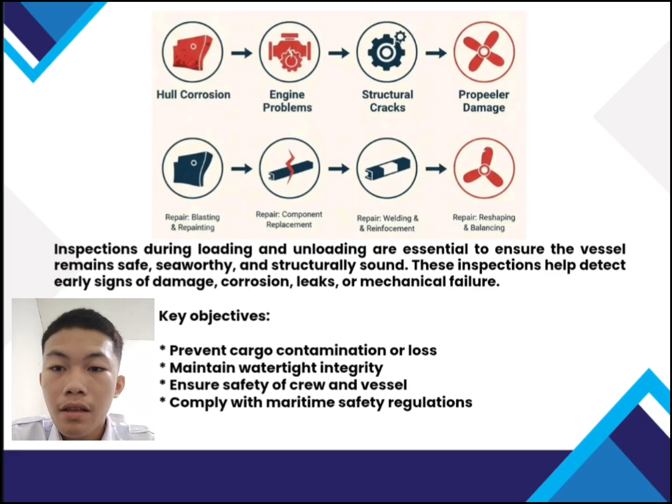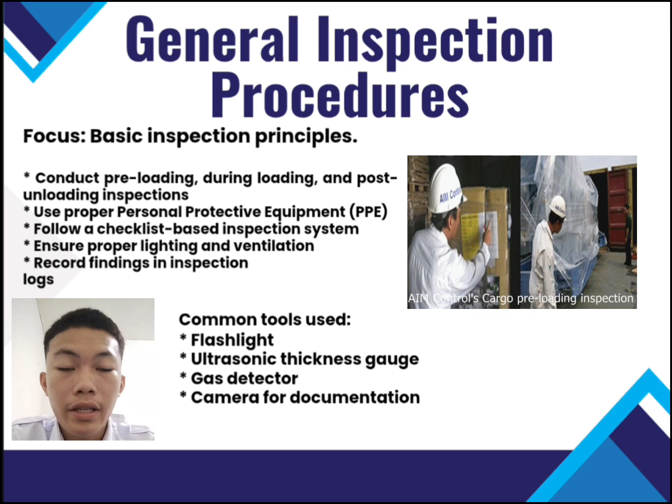General inspection procedures. We focus on the basic inspection principles. First, conduct preloading during loading and post-unloading inspections. Use proper personal protective equipment or PPE. Third, follow a checklist-based inspection system. Fourth, ensure proper lighting and ventilation. And last, record findings in an inspection log.

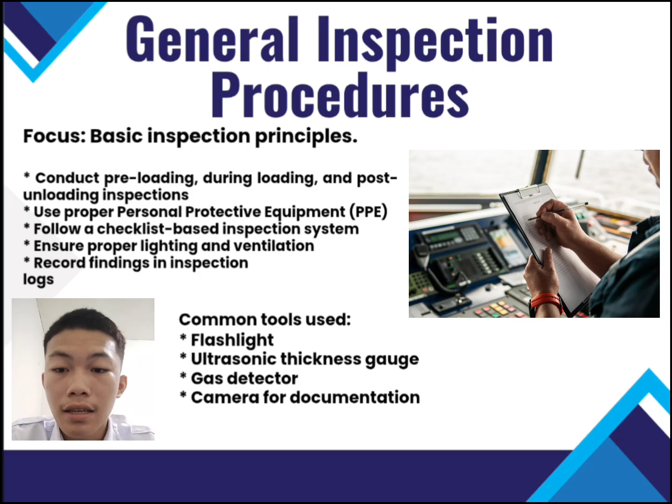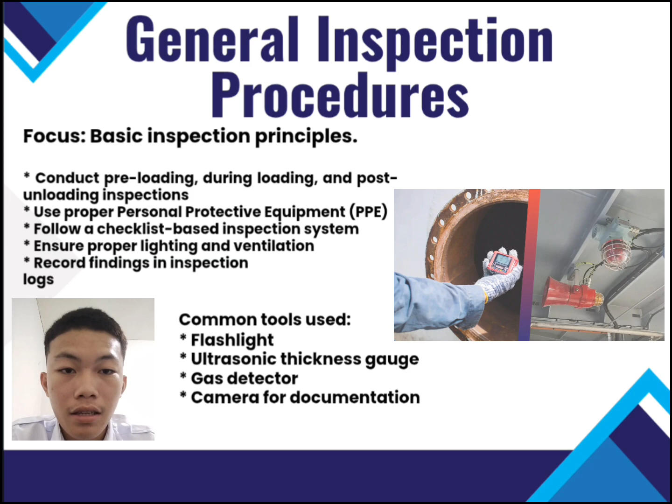And these are the common tools to be used. First, flashlight. Second, ultrasonic thickness gauge. Third, gas detector. And last, camera for documentation.

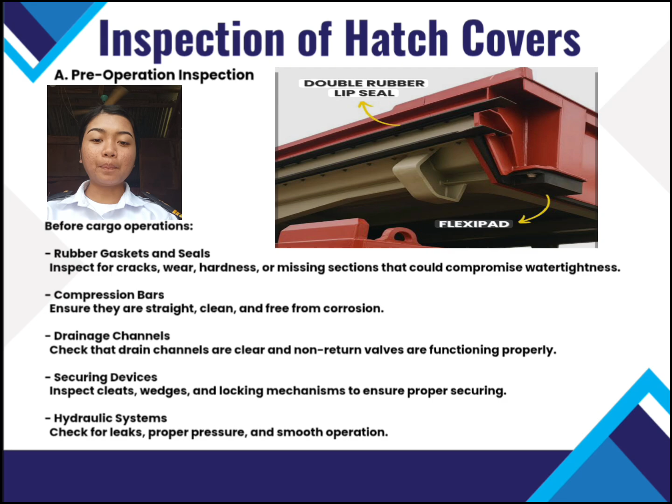Inspection of hatch covers. Hatch covers play a crucial role in protecting cargo from external elements such as seawater and rain. A. Pre-operation inspection. Before cargo operation, inspect rubber gaskets and seals for cracks, wear, hardness, or missing sections that could compromise watertightness.

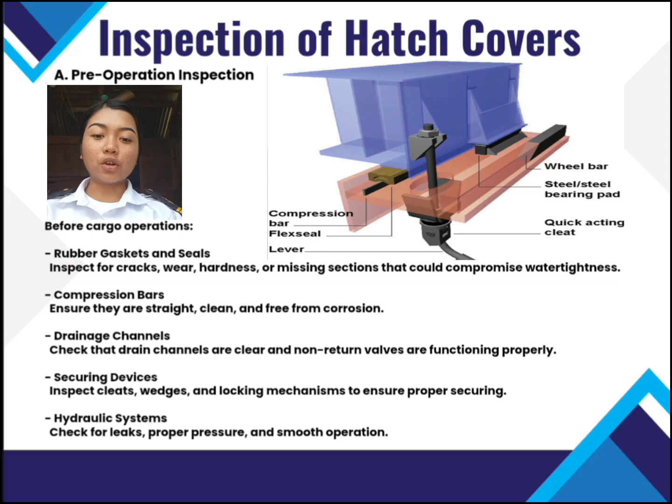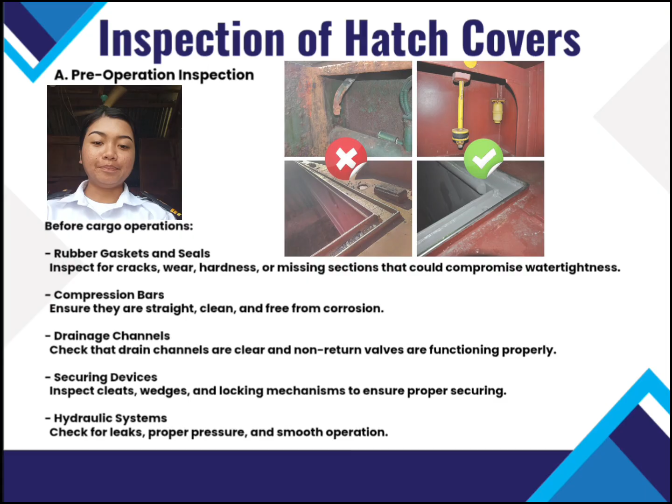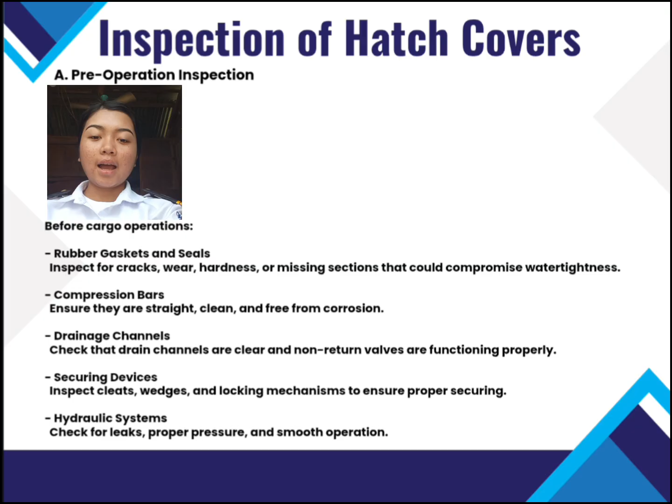Compression bars: ensure they are straight, clean, and free from corrosion. Drainage channels: check that drain channels are clear and non-return valves are functioning properly. Securing devices: inspect cleats, wedges, and locking mechanisms to ensure proper securing. Hydraulic systems: check for leaks, proper pressure, and smooth operation.

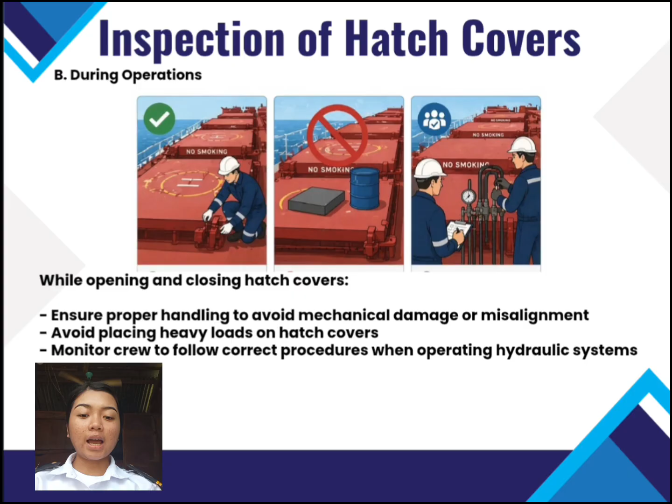B. During operation, while opening and closing hatch covers: ensure proper handling to avoid mechanical damage or misalignment. Avoid placing heavy loads on hatch covers. Monitor crew to follow correct procedures when operating the hydraulic system.

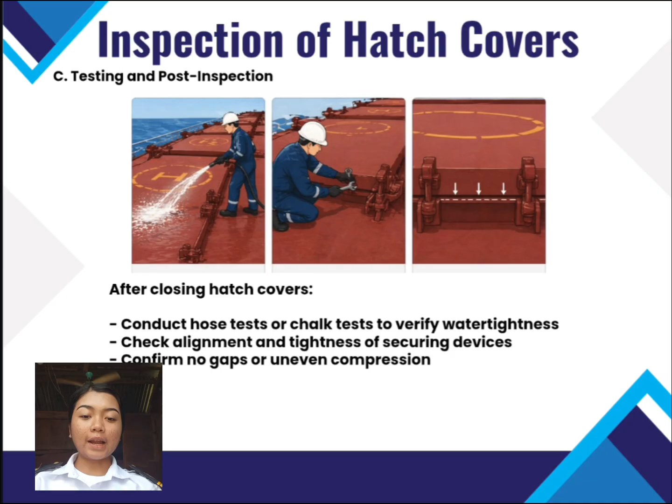C. Testing and post-inspection after closing hatch covers. Conduct hose test or chalk test to verify watertightness, check alignment and tightness of securing devices, and confirm no gaps or uneven compression.

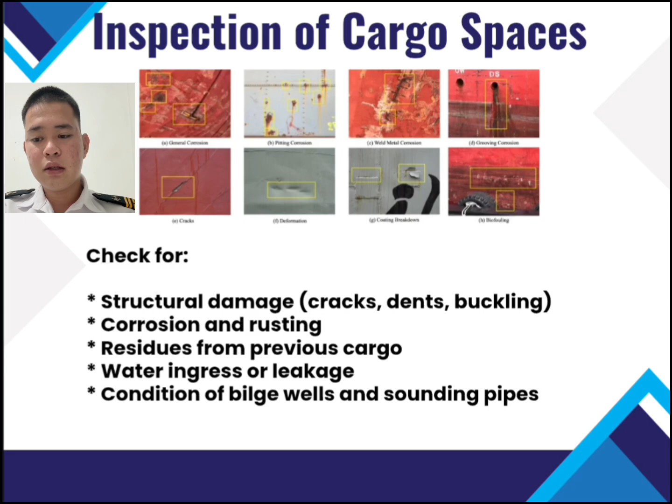Inspection of cargo spaces. Inside the cargo holds, check for structural damage, cracks, dents, buckling, corrosion, and rusting. Residue from previous cargo, water ingress or leakage, and condition of bilge wells and sounding pipes.

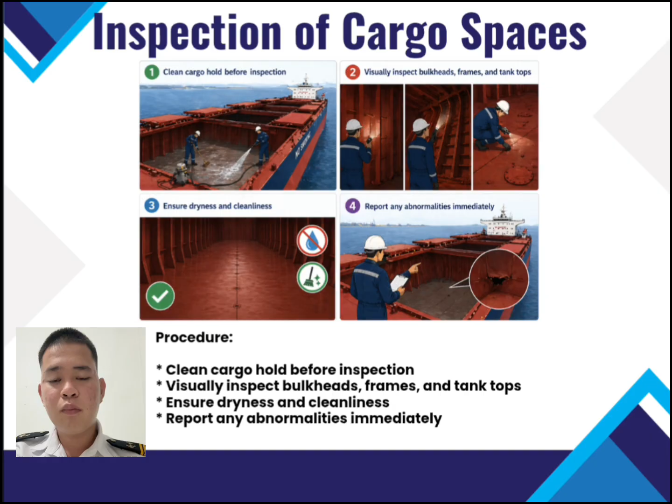Procedure: clean cargo hold before inspection. Visually inspect bulkheads, frames, and tank top. Ensure dryness and cleanliness. Report any abnormalities immediately. Inspection of ballast tanks focuses on internal tank condition.

First, must check for corrosion and coating breakdown, cracks in weld joints, sediment or sludge accumulation, leakage between tanks, and structural deformation.

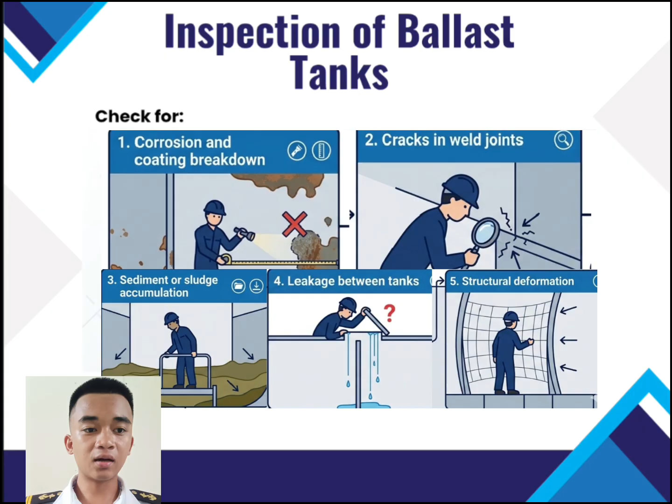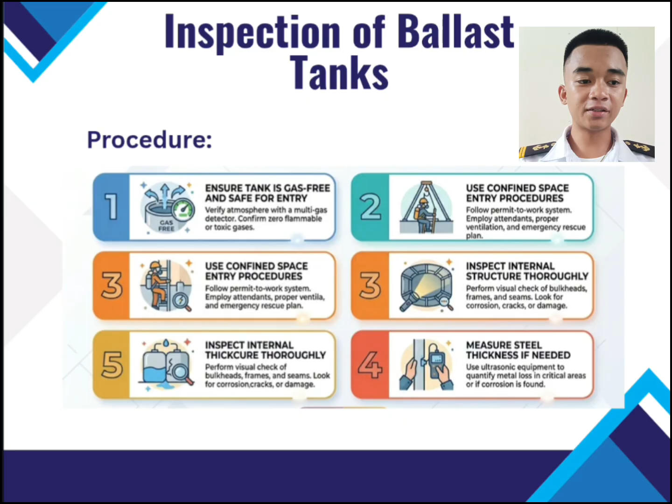Then the procedures: ensure tank is gas-free and safe for entry. Use confined space entry procedures. Inspect internal structure thoroughly and measure steel thickness if needed.

Inspection during loading and unloading operations. The main focus is monitoring while operations are ongoing. During loading and unloading, monitor for unusual sounds or stress, check for cargo spillage or shifting, and observe hatch covers and seals.

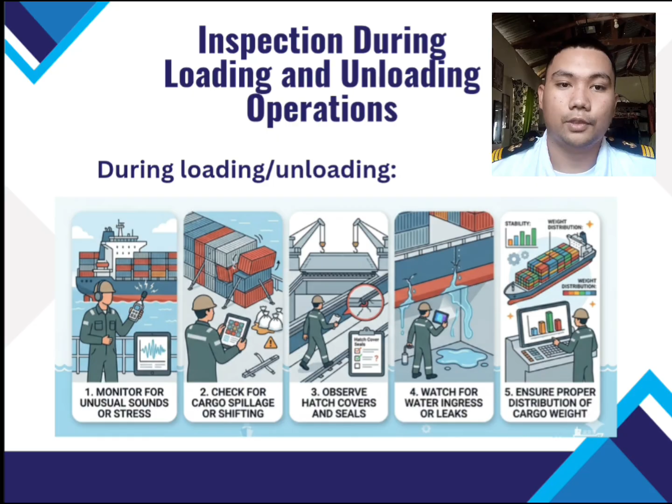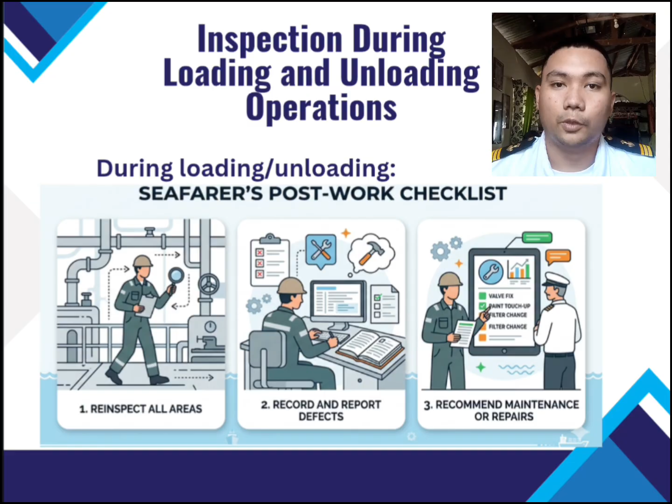Fourth, watch for water ingress or leaks. And lastly, ensure proper distribution of cargo weight. After operation, reinspect all areas, record and report defects, and recommend maintenance or repairs.

In conclusion, proper inspection of cargo spaces, hatch covers, and ballast tanks ensures: first, safety of vessels and crew; second, protection of cargo; third, compliance with maritime standards; and last, prevention of costly damages.